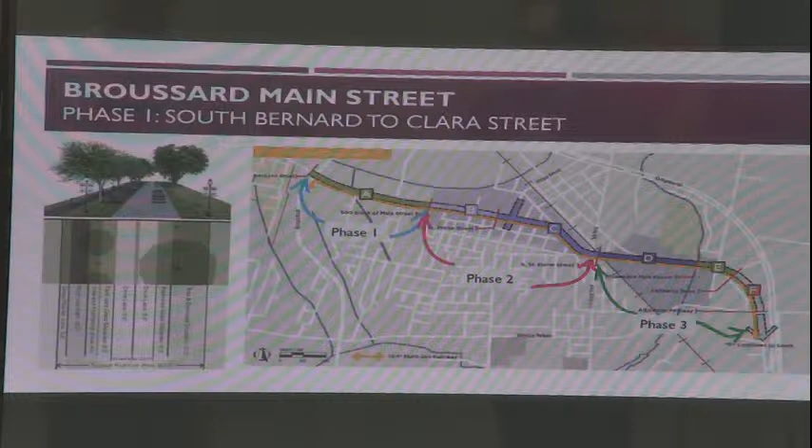Phase 1, which we're here tonight for, is really the phase we're ready to advance to. With your approval, we can start to move that forward for construction bids. One of the things we want to talk about for Phase 1, which is South Bernard to Clara, is that the 2 main benefits of this phase are: first, it addresses some health, safety, welfare issues; secondly, it addresses a lot of quality of life.

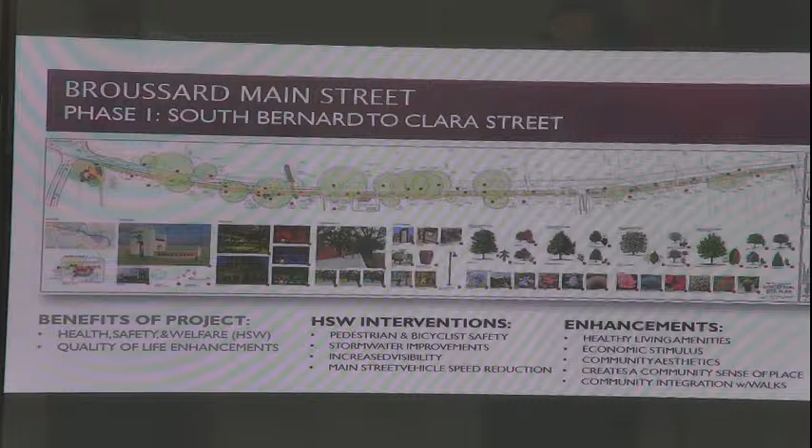Safety, welfare interventions — by providing bicycle and pedestrian pathways, we're addressing the safety of cyclists, vehicles, and pedestrians, giving them clear delineation to walk and bike within the Main Street corridor.

We're also addressing several stormwater issues. There's some on the south side of Main Street — we're taking all those open ditches and creating a nice, safe transition along the walkway, and also realigning the coulee and box culverts, which have some flooding and drainage issues associated with them. Secondly, we're reducing speed along Main Street to 35 miles an hour, so by reducing vehicular speed it becomes a safer environment for everyone.

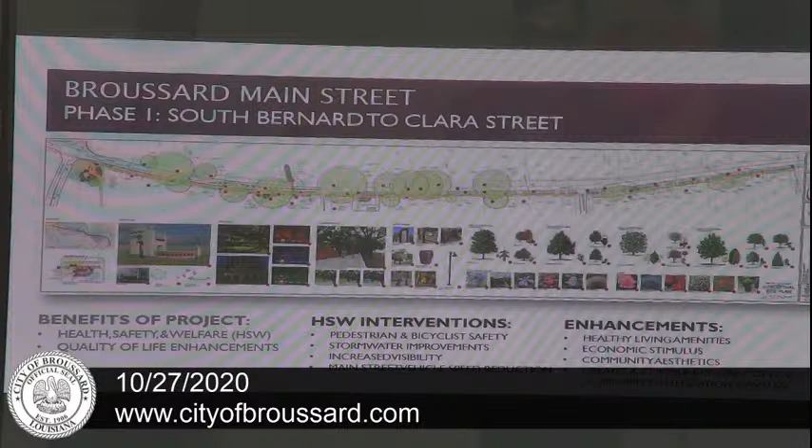The second benefit is the enhancements — we're looking at complete streets, healthy living, the ability for people to walk, jog and ride bikes along this. There's also an economic stimulus associated with that. It improves community aesthetics, honors the community's heritage and historic past, and creates that sense of place about what makes Broussard special. So with all of that, it really talks about integrating all those values.

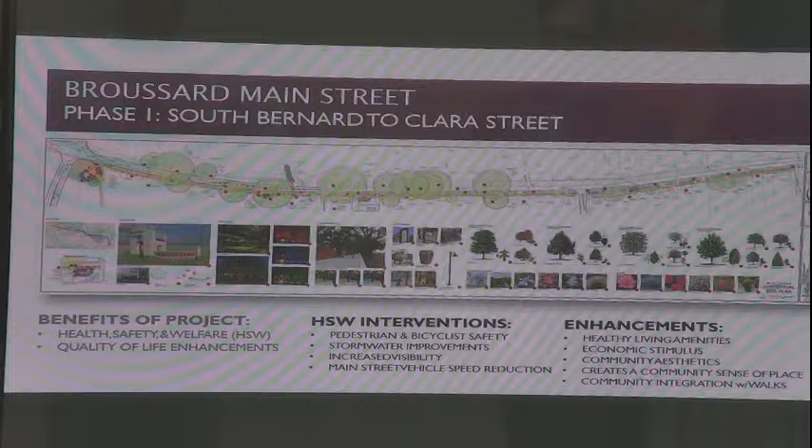So we start off at South Bernard and Main Street at our West Gateway — that location has a gateway entry. We've taken some of the same concepts from the master plan for that gateway, and brought a sign wall down so that at that intersection you can visibly see you've entered Broussard, really demarcating the city limits as you come in.

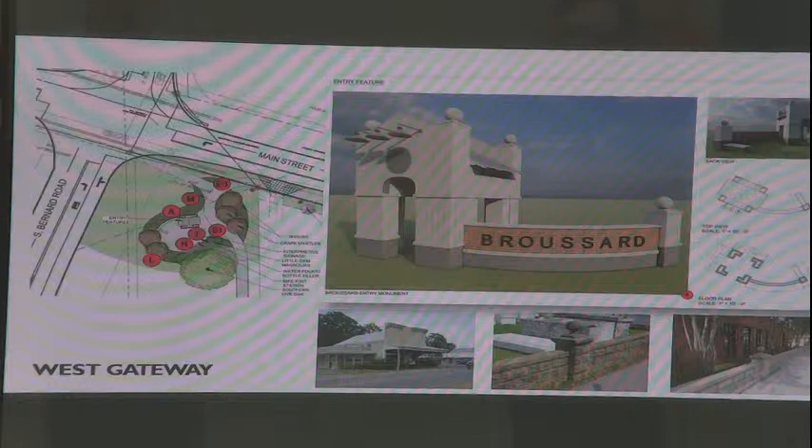We're really incorporating some of the context and architecture features within the community — utilizing the iconic balls on top of the walls at the cemetery, and some of those iconic architecture features from the historic architecture where you've got similar stylistic components. This is not final, so we're open to taking input and ideas as we finalize these components.

At that gateway we'll have several amenities, including garbage cans, benches, bike fix-it stations, and water bottle filling fountains, as well as landscaping and amenities. We also have a series of 3 different types of signs, including orientation signage, which shows where Broussard is and gives people context of where things are located.

The next set of signage is an interpretive sign, a panel like this podium, where people can stand and look at the sign, which gives a story about something interesting within the community or a historic character. The final one on the far right is more of a marker along the pathway, so if there's a unique story or historic structure we want to identify, we can.

We've talked about incorporating an app, so you'd have a number associated with that marker. You can go to the app, look it up, and it might have a video that talks about some unique historic character within the community.

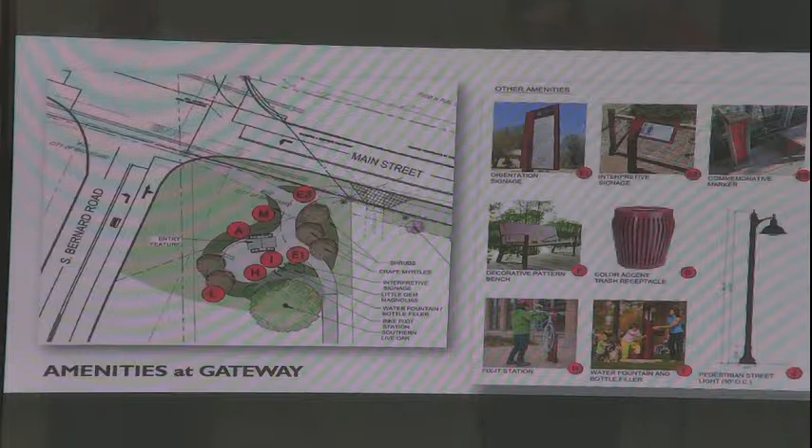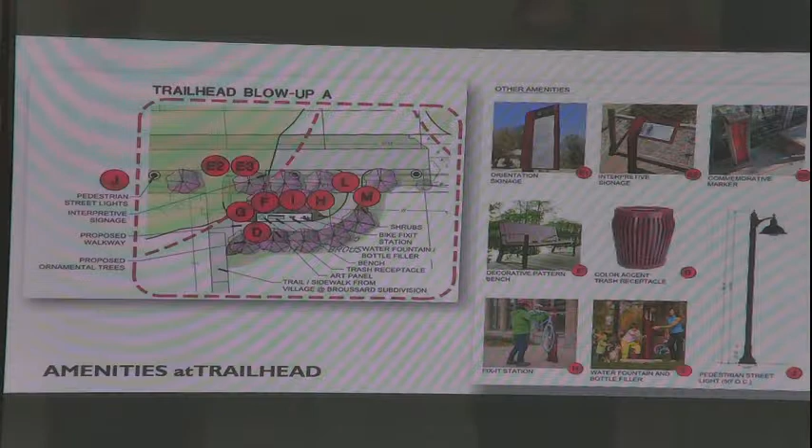We'll also have the same type of amenity at a trailhead, at the sidewalk that comes from Village of Broussard, where that sidewalk connects to Main Street. We have another area for sitting, trash receptacles, and things like that.

From there, we also have lighting along the trail. The trail is 0.6 miles, leading from South Bernard to Clara. We have pedestrian-rated street lights, 18-foot pedestrian graded street lights that run along the pathway on the south side, between the pathway and the right-of-way line.

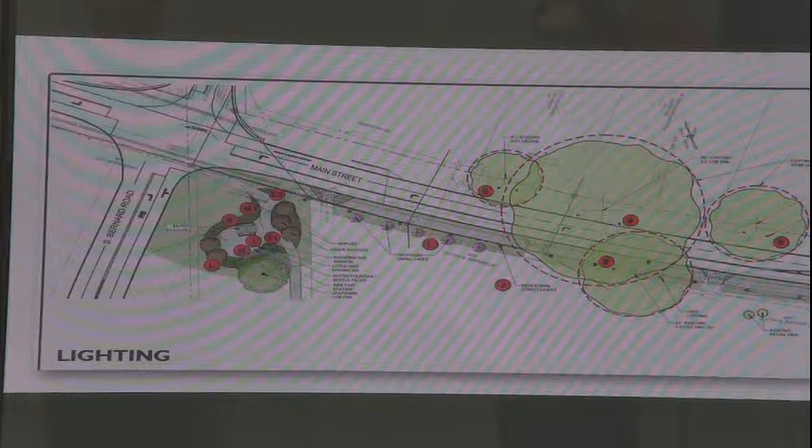Along with that, we also have lighting of 14 existing very large live oaks that are part of the charm and beauty of Broussard. We want to look at both uplighting and downlighting within those trees—you might call it moonlighting—so you don't see a light source, but you see the ambiance and illumination of those trees.

We're also looking at including LED color-changing technology in those lights, so that during different times of the year you can have Christmas colors, Fourth of July colors, you name it. It could be festive and really identify that, and as you enter the community, you start making a statement with lighting.

Again, we talked about the drainage infrastructure on the south side. We're filling in and culverting a lot of those ditches that all drain into this canal, or coulee, so the box culvert underneath Main Street will have to be replaced because there's about a two-foot differentiation in elevation. If there are questions, Phil can provide more information, but this will help with a lot of the stormwater drainage components of the Main Street project.

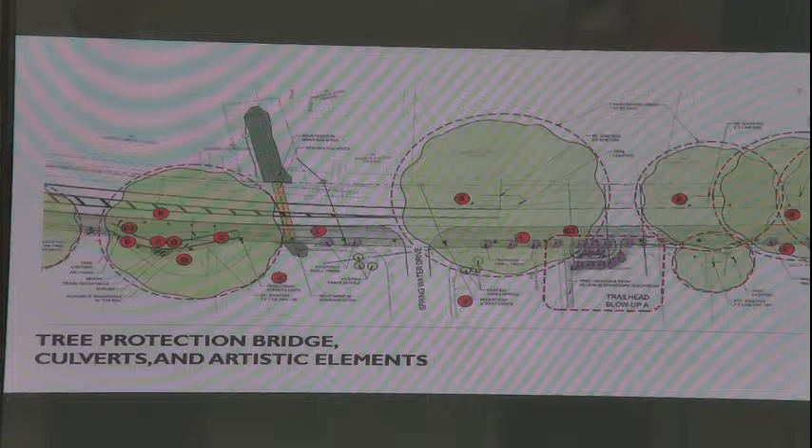If we go to the next slide, we get to right by the pump yard, the pump house, the lift station. There's a large live oak there, and one issue is that the pathway interferes with the existing roots of that live oak. If we just bring the pathway in on top of those roots, it would kill that beautiful live oak.

So we're using this image where we'll deck over—it's going to be a boardwalk, but not a wood boardwalk, which would need replacing in 5 or 10 years. We're using precast concrete that's going to basically last a lifetime. We're also going to embellish that a bit by using some sort of metal panel.

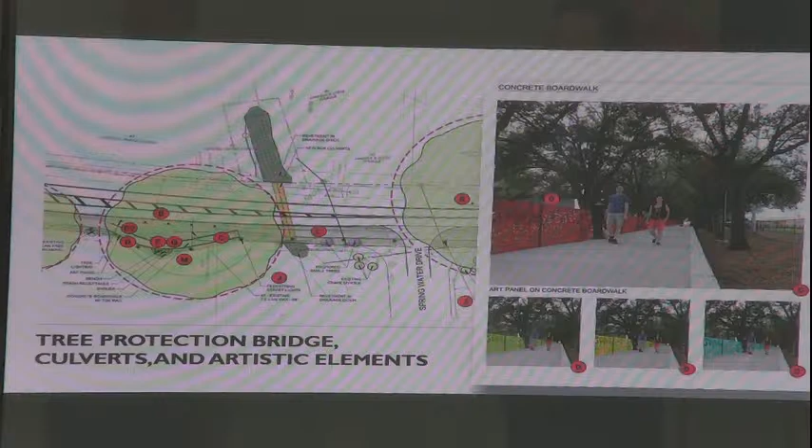Maybe it's gear wheels, maybe some sort of iconic piece with a color scheme that starts to make an artistic impression throughout the community, and that could be repeated in other phases.

Now we get into the idea of tree plantings and landscape. We've identified both large trees and small trees—large trees are ones that will ultimately grow more than 30 feet, small trees lower than 30 feet. What's key, especially in phase one and phase two, is there are areas where we can bring in large trees, but we have overhead power lines, so we need to be very cognizant of where we plant certain types of trees.

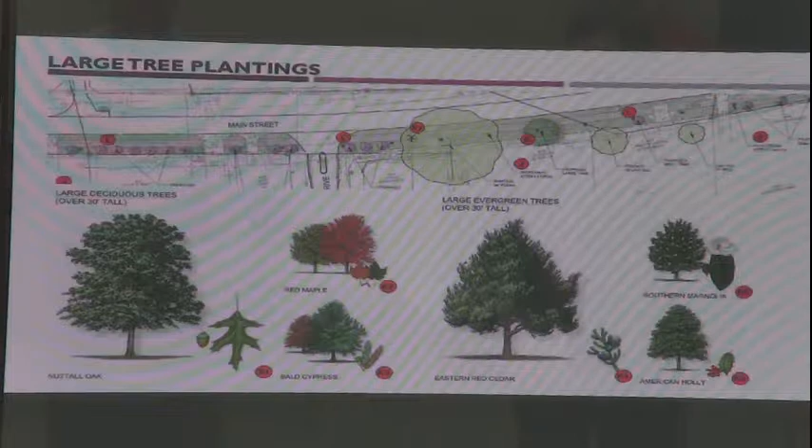Again, we've got a palette of different tree types. We're certainly open to taking input and recommendations on likes and dislikes, but the idea is that we want to make sure we use the right tree at the right place so we don't cause infrastructure damage in the long term.

The next slide shows some examples of the small trees, and the following slide shows some of the more landscape shrubs and flowers you'd normally see in a Louisiana landscape, which will really be highlighted at the gateway, a bit at that large bridge spanning over the critical root zone, and also at the trailhead there.

So if we go to the following slide, we have some quick facts on what's provided in phase one. We're looking at 0.6 of a mile, 10-foot wide concrete pathway. We're going to address some stormwater and potential flooding issues. We're also including a number of street lights or pedestrian lights. We're lighting 14 live oaks with color-changing LED lights. We've got 60 trees along the phase one section, some landscaping, commemorative markers, a variety of signage, and a lot of amenities: benches, trash receptacles, bike fixing stations, and water bottle filling stations.

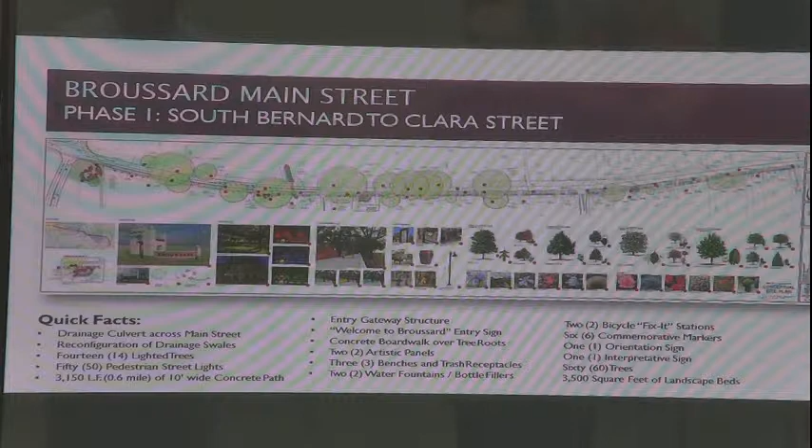Chad, just to clarify, I didn't hear you mention the width of the multi-use path, the 10-foot wide. That's right, a 10-foot pedestrian and biking concrete path, multi-use, so that bicyclists and pedestrians alike can all share the pathway.

On the downstream side, you can see the property owner is experiencing some erosion on his property. He's got a fence that's fallen into that coulee. So what we're going to do is address two things with the box culvert. It's designed for a 50-year storm, giving it considerably more capacity than the existing box culvert. We're also going to armor the channel upstream and downstream, and try to restore that channel section downstream to stop the erosion, so we can restore that gentleman's property to what it used to be.

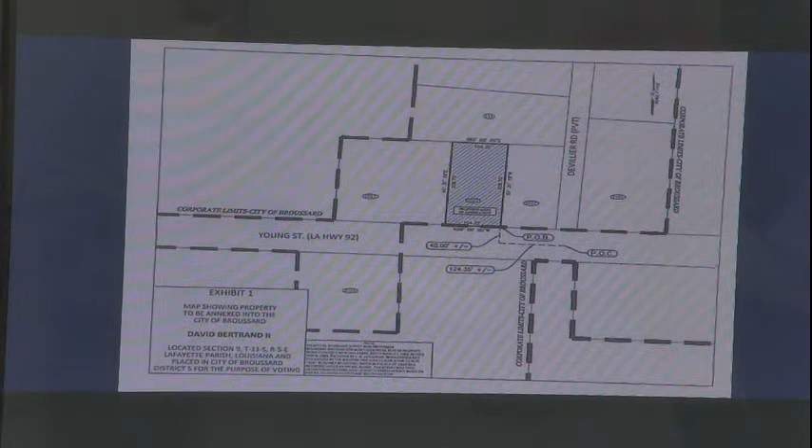Second. Don, I believe you may want to comment on this, but this ordinance was introduced at our last meeting. It is up for final adoption now. The maps have been supplied in the packet. Do you have any comments on this item?

No, Mr. Mayor, it was introduced previously. I've received no further comments in regards to that. We have the proper publication. The notices have been put out in the newspaper. So if it's adopted tonight, it will become a final ordinance, and we will, of course, publish it by all the appropriate departments.

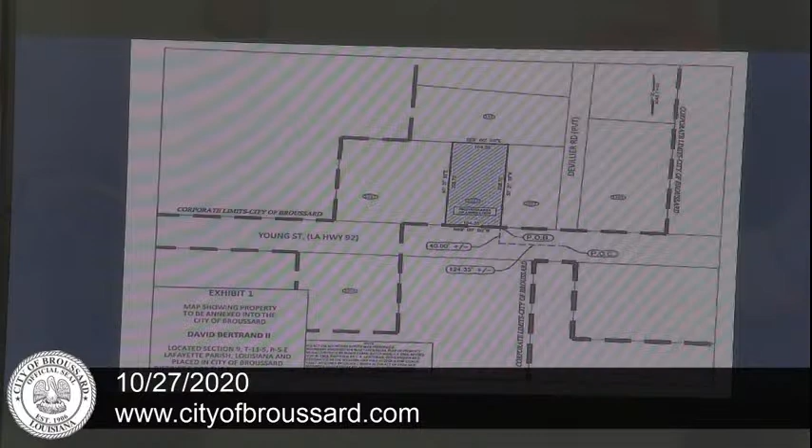Is there any public comment, Tina? No public comments. Council comments? Question. District 5, Yes. District 6, Yay. District at large. District 1, yes. District 2, Yes. District 3, Yes. District 4, Yes. Motion carries.

Item 6.2, ordinance number 20-663. An ordinance of the City Council enacting ordinances and sections to provide for the annexation of certain properties located in Section 9, Township 11 South, Range 5 East, Lafayette Parish, Louisiana, being known as the Helen St. Amand annexation in Voting District 5.

Do we have a motion to adopt? I do make a motion. Don, again, I'll refer to you. This is up for final adoption. It was presented at a previous meeting. Yes, Mr. Mayor, it was previously introduced. Plats were attached to the ordinance. We had some discussion on it. Since then, I've heard no further comments. We have published the notice. Everything is in order for final adoption if council so chooses.

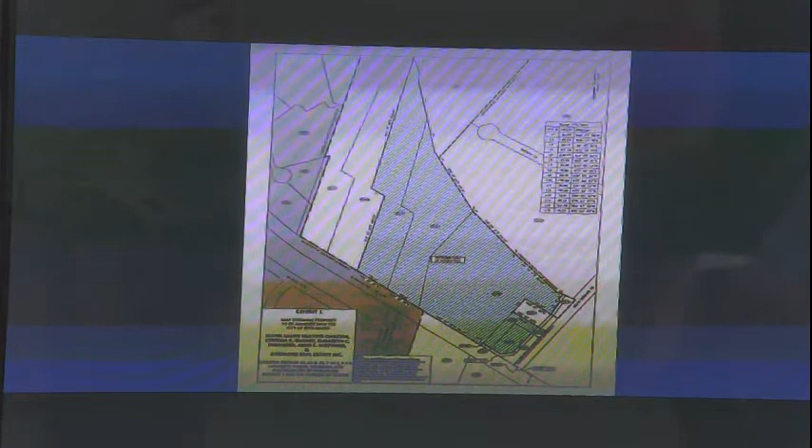Do we have a motion to adopt? Make a motion. Don, would you like to comment? This is the second time this adoption appears at our council meeting. Yes, Mr. Mayor, it does come up for final adoption. All the notices have been made, and I can tell you that there was a lot of good work performed on this annexation by Mr. Como's firm, especially Daniel. We needed this annexation for the South Bernard Road area, and very happy that we were able to get it in a very timely manner.

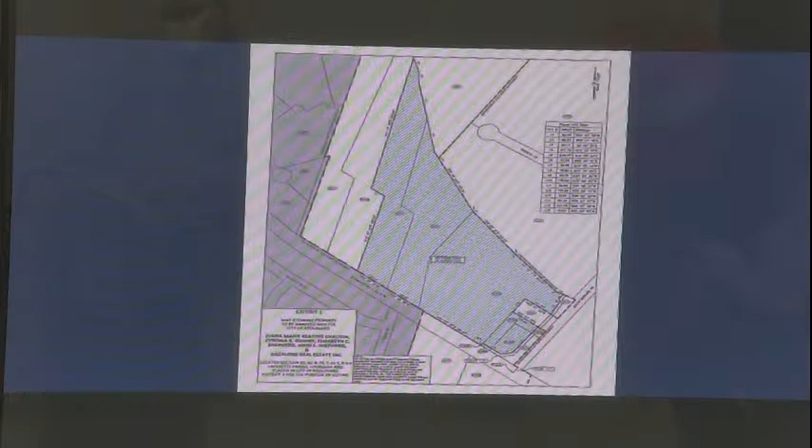Thank you, Don. Is there any public comment? No public comments. Council discussion? District 1? Yes. District 2? District 3? Yes. District 4? Yes. District 5? Yes. District 6? Yay. At large? Motion carries.

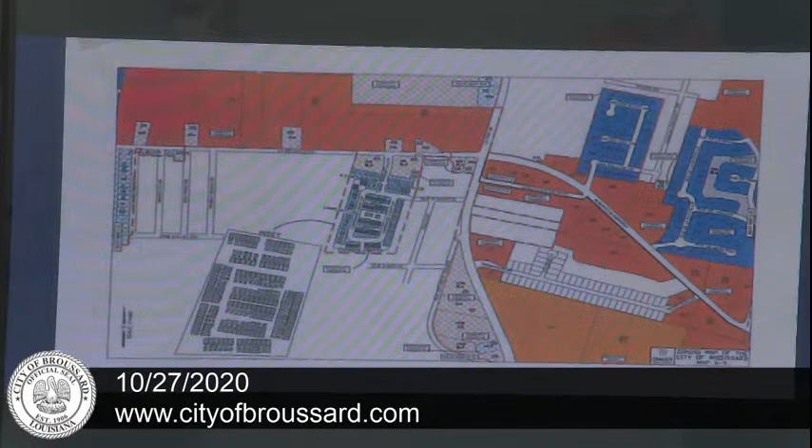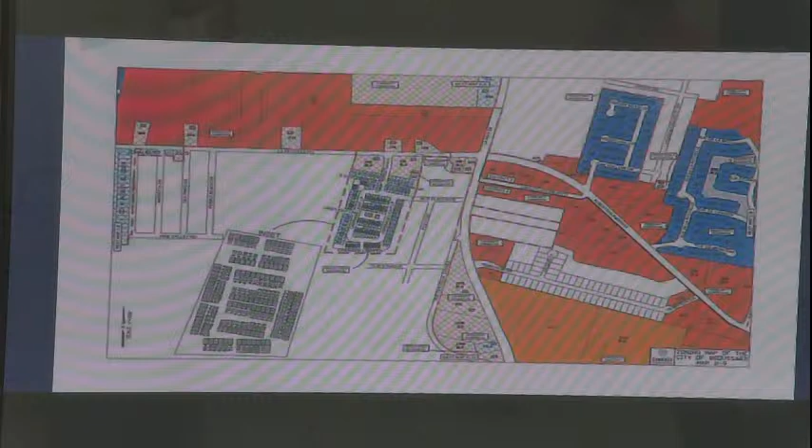Item 6.5, ordinance number 20-666. An ordinance amending the zoning ordinance to include the following maps: Map D-8, portions of Youngsville Highway, LA Highway 89, Blackjack Lane, and La Nouvelle Road. Map D-9, portions of La Nouvelle Road, Youngsville Highway, LA Highway 89, Coachman Drive, Rue Plaisance, Carriage Light Loop, Rue de Beauchesnes, Gordon Crockett Drive. Map D-10, portions of Youngsville Highway, Highway 89, Ambassador Caffrey Parkway, Russo Road, Heart D Farm Road, Melissa Drive, Amberwood Drive, Teakwood Drive, Paper Shell Drive, and Estate Lane. Map E-10, portions of Paper Shell Drive, Estate Lane, Teakwood Drive, Amberwood Drive, and Heart D Farm Road.

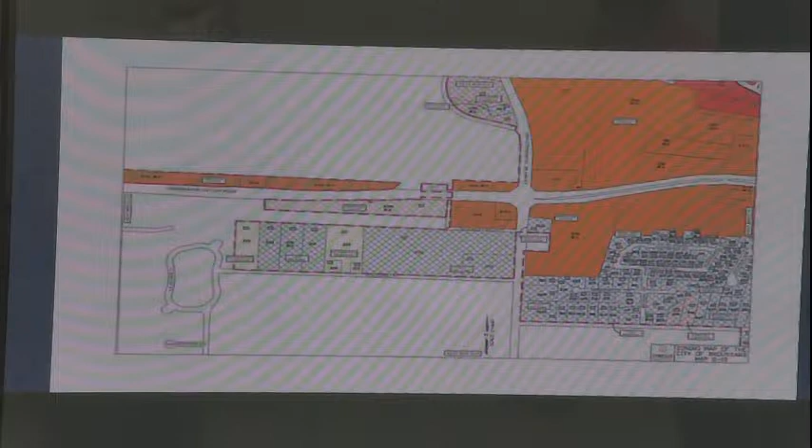Do we have a motion to adopt? I'll move to adopt.

Don, would you like to comment? Yes, Mr. Mayor. Of course, it came before our commission. Had plenty of discussion on it. Everybody seems to be in favor of this. I've heard no further comments on this zoning. This goes a long way in trying to move forward on our zoning issues in the city of Broussard. So it is my recommendation that we pass this ordinance so that we complete that process.

Thank you. No public comments. Any council comments?

Question. District 2? Yes. District 3? Yes. District 4? Yes. District 5? Yes. District 6? Yay. At large? District 1? Yes. Motion carries.

Item 6.6, ordinance number 20-667, an ordinance of the City Council enacting ordinances and sections to provide for the annexation of certain properties located in sections 21 and 57, Township 10 South, Range 5 East, Lafayette Parish, Louisiana, being known as the Blue Wing Real Estate LLC annexation off of South Bernard Road in Voting District 1.

Do we have a motion to adopt? I'll make a motion.

Mr. Landry, once again. Yes, Mr. Mayor. This ordinance, I believe, should be passed because we have the proper notices, the advertising was made, and all is in order. I've heard no negative comments. I remember the discussion at the prior meeting. The plat was in the packet, I believe. Everybody had a good chance to look at it last time. I see no reason why this should not go forward from a legal standpoint.